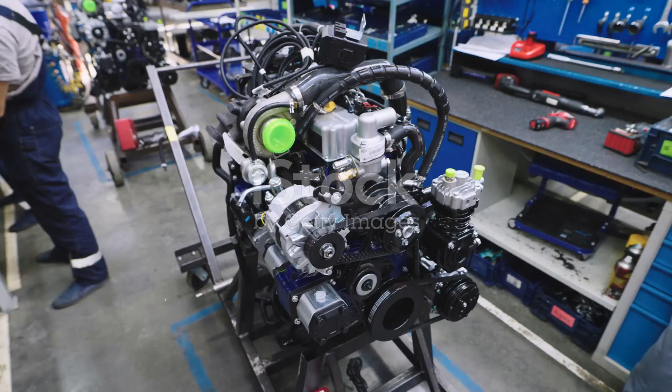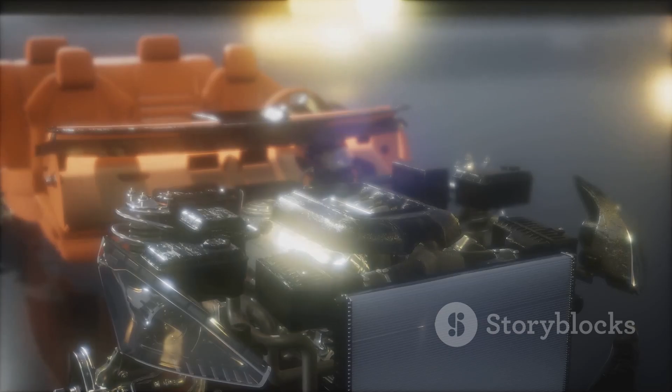Engines are the beating hearts of countless machines that power our world. From cars and motorcycles to lawnmowers and chainsaws, these incredible devices transform fuel into mechanical energy, enabling motion and work. Understanding the different types of engines and their operating principles is key to appreciating the ingenuity behind their design and function. This essay delves into the fascinating world of internal combustion engines, exploring their classification, operation, and performance characteristics.

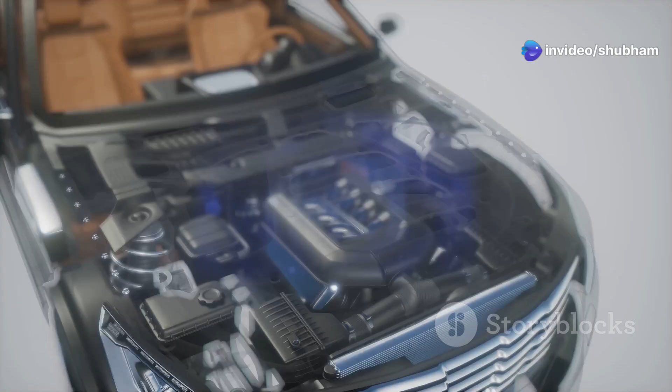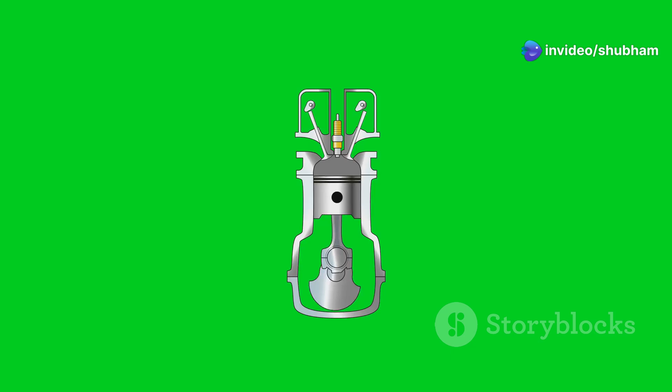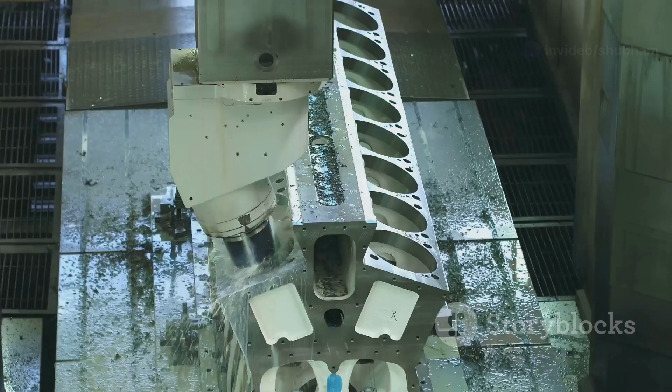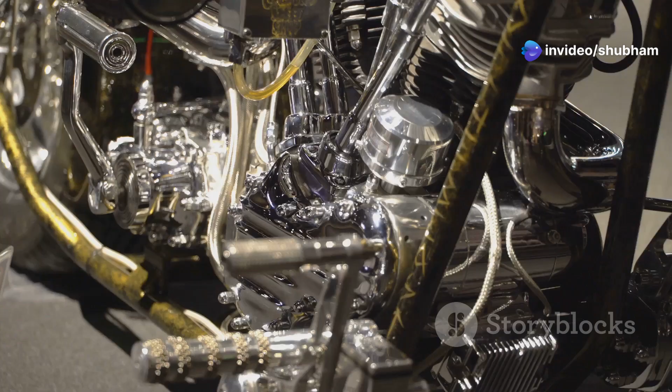Engines are broadly classified based on two key factors: the type of fuel they utilize and their operating cycle. Internal combustion engines, the focus of this essay, burn fuel within a closed chamber to generate power. These engines can be further categorized as either spark ignition (SI) or compression ignition (CI) engines, depending on how the fuel-air mixture is ignited. In SI engines, commonly found in gasoline-powered vehicles, a spark plug ignites a pre-mixed fuel-air charge. In contrast, CI engines, often used in diesel-powered vehicles and machinery, rely on the heat generated by compressing the air to ignite the fuel injected into the combustion chamber.

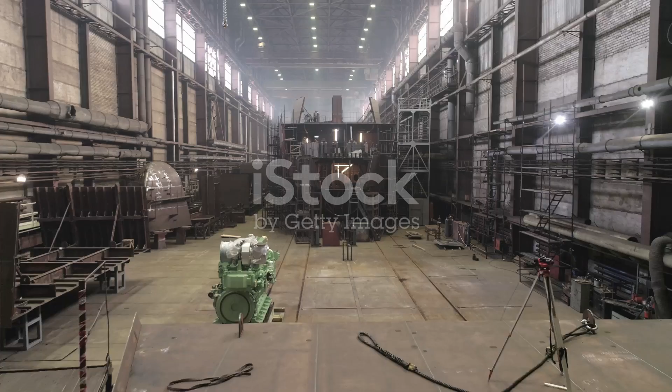This fundamental difference in ignition methods leads to variations in engine design, performance characteristics, and emissions. Understanding the distinctions between SI and CI engines, as well as their respective operating cycles, is crucial for comprehending the diverse applications and capabilities of these remarkable machines. By delving into the intricacies of engine design and function, we can gain a deeper appreciation for the engineering marvels that propel our modern world.

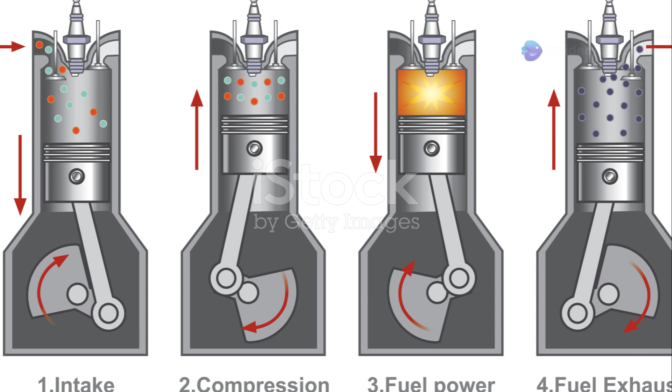Internal combustion engines, the workhorses of modern transportation and industry, derive their power from the controlled combustion of fuel within a confined space. Unlike external combustion engines, such as steam engines, where combustion occurs outside the engine, internal combustion engines directly harness the expansive force of burning fuel to drive mechanical motion.

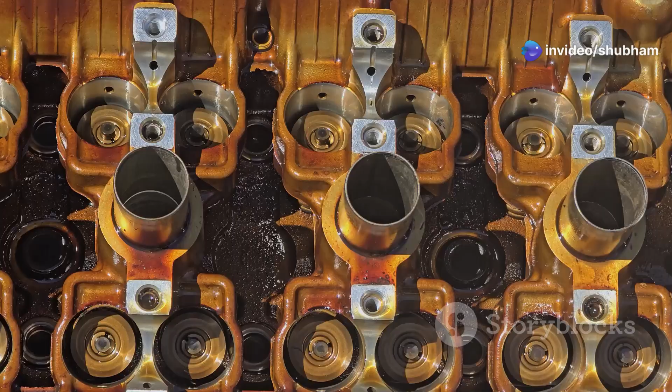At the heart of every internal combustion engine lies a cylinder, typically a cylindrical chamber, housing a piston that moves back and forth. This reciprocating motion of the piston is converted into rotary motion, which ultimately powers the wheels of a vehicle or drives other machinery.

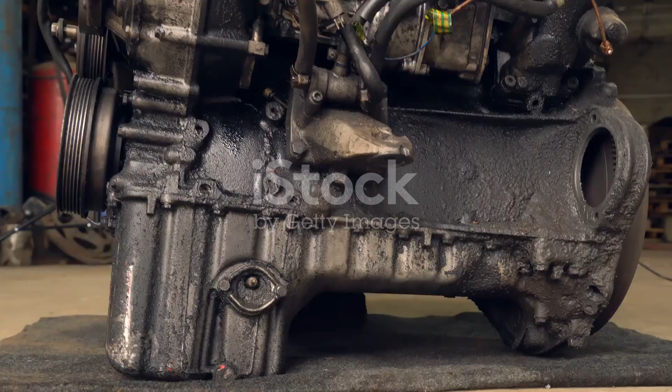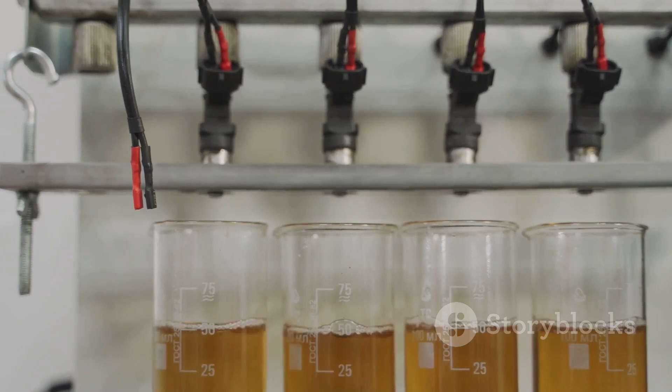The combustion process within the cylinder is a carefully orchestrated dance of fuel, air, and ignition, designed to extract maximum energy from the fuel while minimizing waste and emissions. The fuel, whether gasoline, diesel, or other combustible substances, is mixed with air in precise proportions to create a combustible mixture. This mixture is then introduced into the cylinder, where it is compressed by the piston.

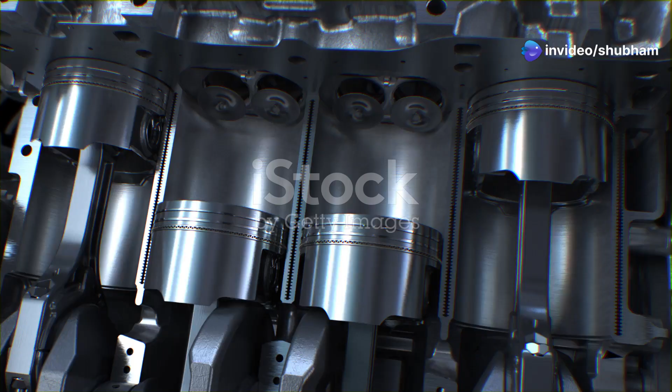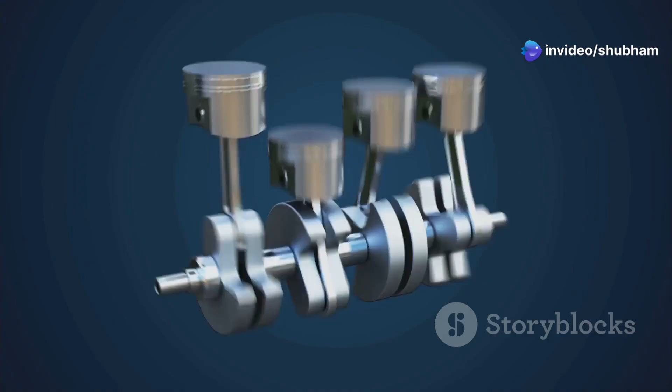The compressed mixture is ignited either by a spark from a spark plug in SI engines or by the heat of compression in CI engines, causing a rapid expansion of gases. This expansion of gases exerts a powerful force on the piston, pushing it downwards and initiating the engine's power stroke. The reciprocating motion of the piston is transmitted to a crankshaft via a connecting rod, converting the linear motion into the rotary motion that drives the vehicle or machinery.

Understanding the principles of internal combustion is essential for appreciating the ingenious design and operation of these ubiquitous powerhouses.

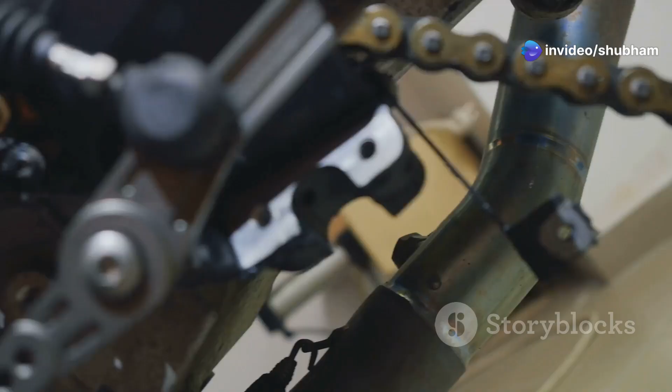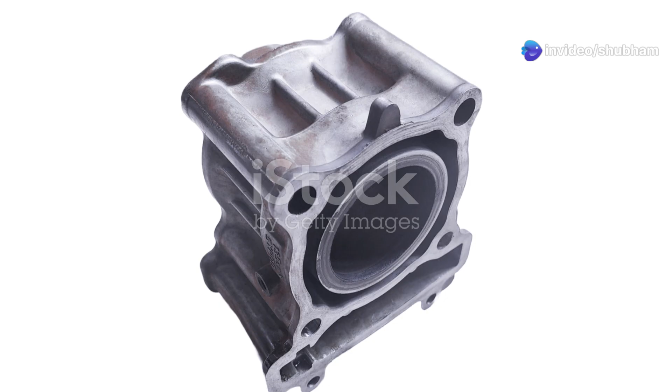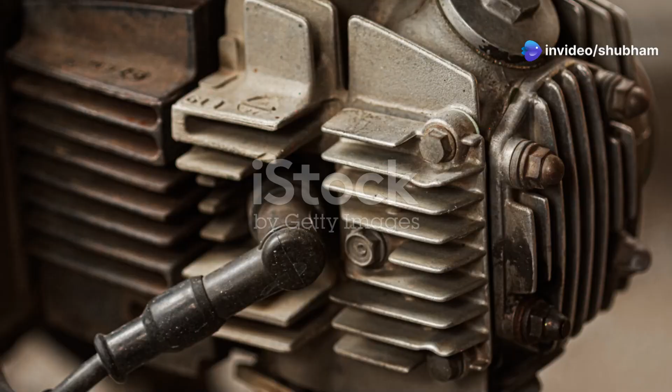Two-stroke engines, known for their simple design and high power-to-weight ratio, complete a power cycle with just 2 strokes of the piston, or 1 revolution of the crankshaft. Unlike their 4-stroke counterparts, two-stroke engines lack dedicated valves for intake and exhaust, relying instead on ports in the cylinder wall that are covered and uncovered by the piston's movement. This simplified design, while offering advantages in terms of compactness and weight savings, comes with certain trade-offs.

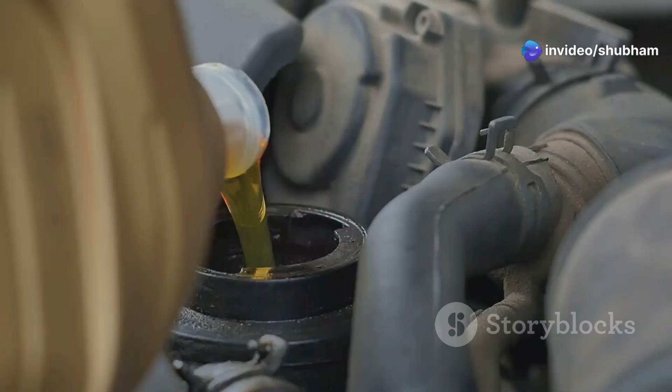The absence of dedicated valves necessitates the mixing of lubricating oil with the fuel, as the piston cannot effectively lubricate the cylinder walls on its own. This oil-fuel mixture is then drawn into the crankcase, which acts as a temporary reservoir before being transferred to the combustion chamber.

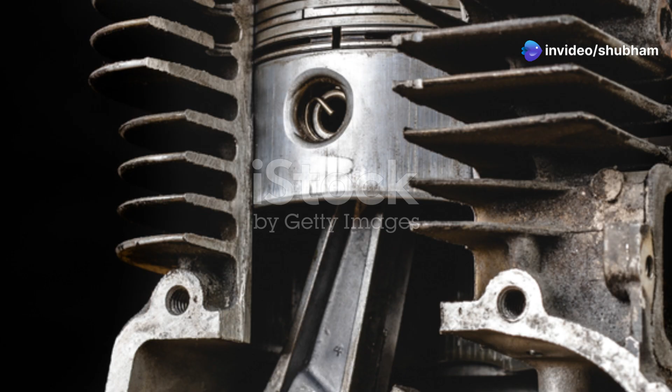As the piston moves upwards, it compresses the fuel-air mixture in the combustion chamber, while simultaneously drawing a fresh charge of fuel-air mixture into the crankcase through the intake port. When the piston reaches the top of its stroke, ignition occurs, either by a spark or compression, forcing the piston downwards.

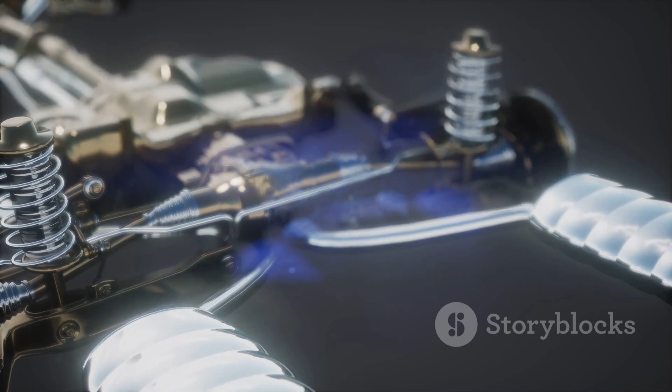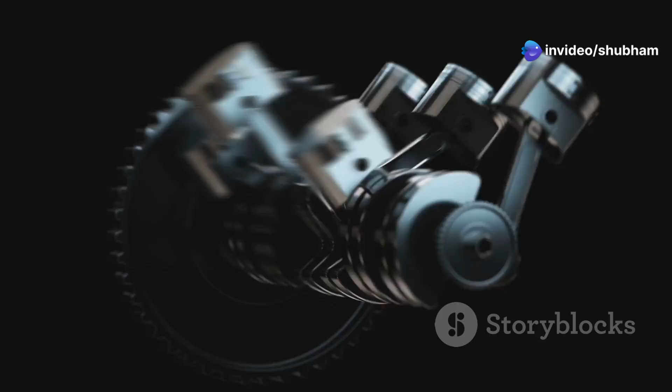During this downward stroke, the piston first uncovers the exhaust port, allowing the burnt gases to escape. Further downward movement uncovers the transfer port, allowing the fresh fuel-air mixture from the crankcase to flow into the combustion chamber. The upward stroke then repeats the cycle, compressing the fresh charge and expelling the remaining exhaust gases. This continuous cycle of intake, compression, combustion and exhaust occurring within 2 strokes of the piston makes the 2-stroke engine a compact and powerful, albeit less efficient and more polluting, alternative to its 4-stroke counterpart.

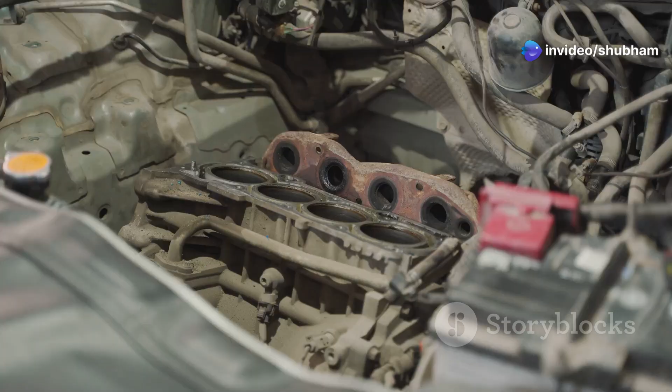4-stroke engines, the dominant type of internal combustion engine in automobiles and many other applications, operate on a more complex but ultimately more efficient cycle than their 2-stroke counterparts. As their name suggests, 4-stroke engines require 4 strokes of the piston, or 2 complete revolutions of the crankshaft, to complete one power cycle. This cycle consists of 4 distinct stages: intake, compression, power and exhaust.

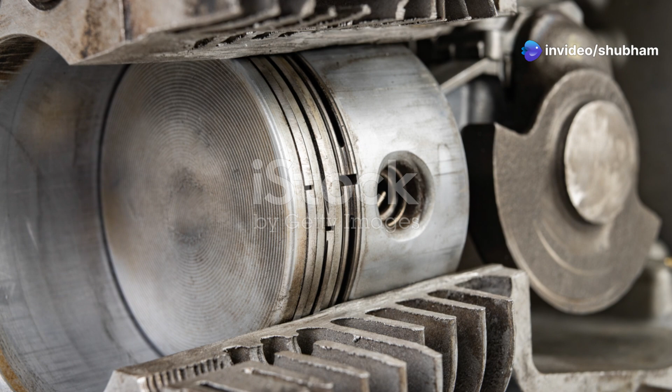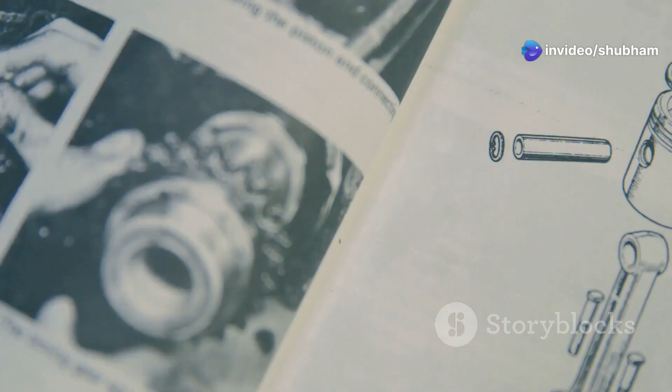During the intake stroke, the piston moves downwards, drawing in a fresh charge of fuel and air through an intake valve located in the cylinder head. As the piston reverses direction and moves upwards, the intake valve closes and the trapped fuel-air mixture is compressed.

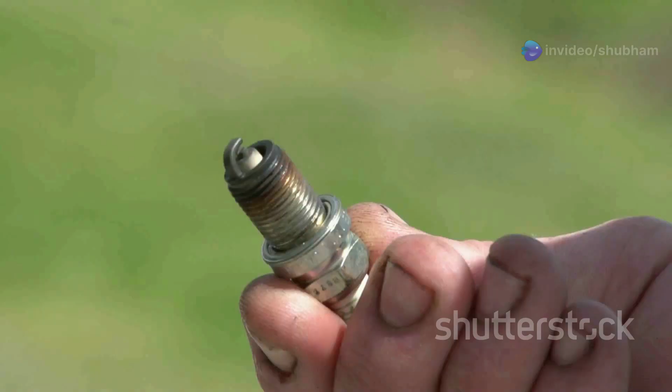This compression stroke significantly increases the temperature and pressure of the mixture, preparing it for ignition. At the top of the compression stroke, ignition occurs, either by a spark from a spark plug in gasoline engines, or by the heat of compression in diesel engines.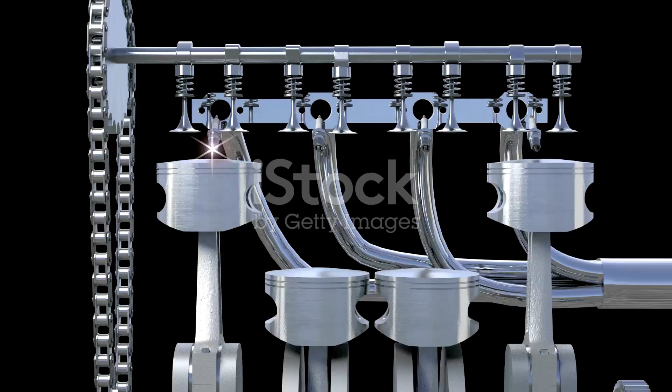The resulting combustion rapidly expands the gases, forcing the piston downwards in a powerful stroke that constitutes the engine's power phase. As the piston nears the bottom of its stroke, the exhaust valve opens, allowing the burnt gases to be expelled from the cylinder by the upward-moving piston during the exhaust stroke. This completes one full cycle of the 4-stroke engine, with the process repeating continuously to generate power.

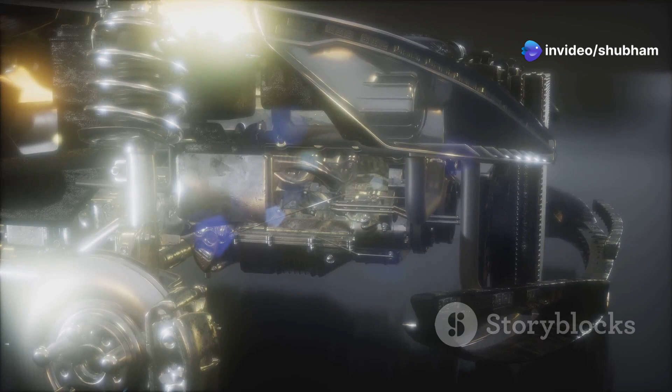The 4-stroke cycle's separation of intake, compression, power and exhaust strokes allows for a more controlled and efficient combustion process, making it the preferred choice for a wide range of applications.

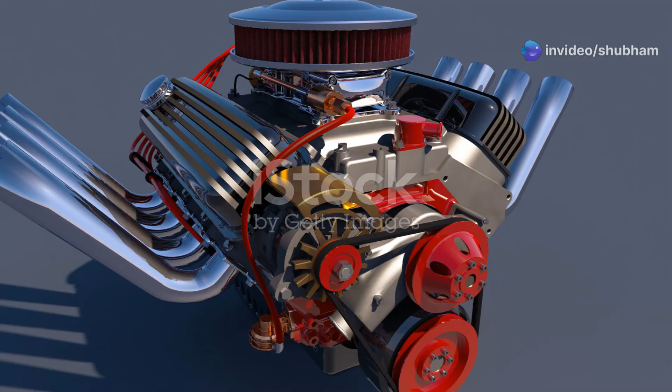Section 5. Mapping the engine's heartbeat: indicator diagrams. Indicator diagrams, graphical representations of the pressure changes within an engine's cylinder during one complete cycle, provide valuable insights into the engine's performance characteristics.

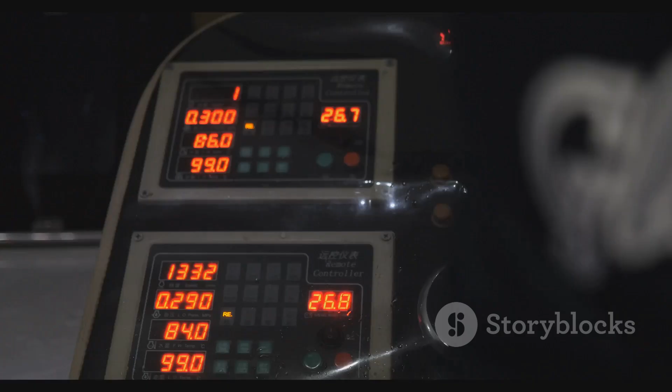These diagrams, traditionally obtained using mechanical indicators but now commonly generated electronically, plot cylinder pressure against piston displacement or crank angle. The shape of the indicator diagram reveals crucial information about the combustion process, valve timing, and overall engine health.

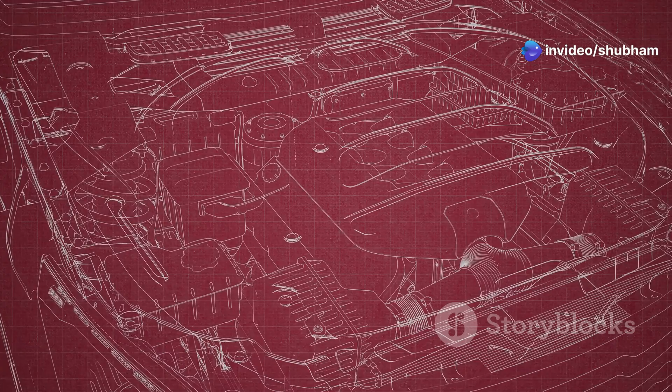The area enclosed by the diagram represents the work done by the gases on the piston during one cycle. Analyzing this area allows engineers to calculate the engine's indicated power, a measure of the power developed within the cylinder.

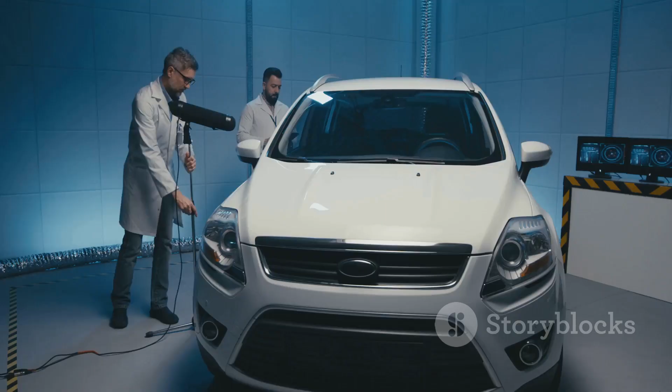Theoretical indicator diagrams, based on idealized thermodynamic cycles, serve as benchmarks for comparison with actual engine performance. Actual indicator diagrams, obtained from real-world engine testing, deviate from the ideal due to factors such as heat transfer, friction losses, and the complexities of the combustion process.

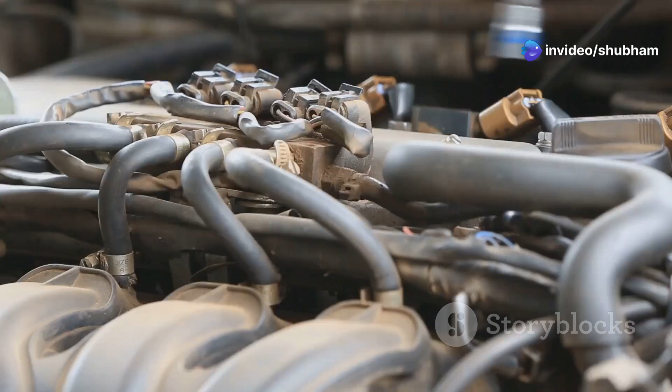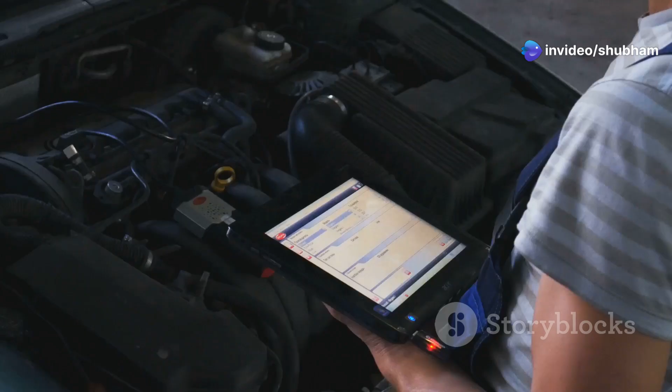Comparing theoretical and actual indicator diagrams helps engineers identify areas for improvement in engine design and operating parameters. By analyzing the shape and characteristics of these diagrams, engineers can optimize valve timing, combustion chamber design, and other factors to enhance engine efficiency, power output, and emissions performance. Indicator diagrams, therefore, serve as invaluable tools for understanding and improving the performance of internal combustion engines.

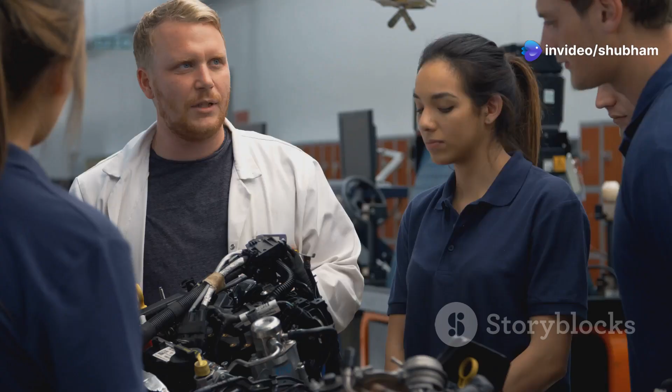Section 6. Power and efficiency: measuring engine performance. Evaluating engine performance involves assessing its power output and efficiency, both crucial factors in determining its suitability for various applications.

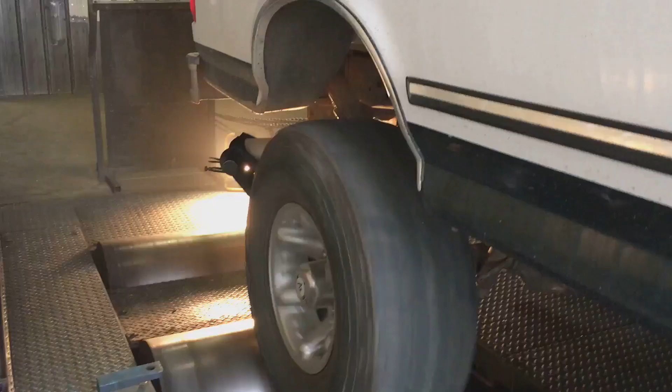Indicated power, calculated from the area enclosed by the indicator diagram, represents the theoretical power developed within the cylinder, while brake power measures the actual power delivered to the output shaft.

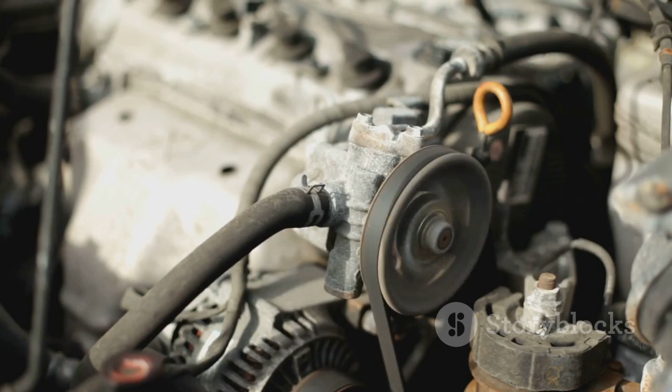The difference between indicated power and brake power reflects the frictional and mechanical losses within the engine, such as friction between moving parts and energy consumed by auxiliary components like the oil pump and alternator. Mechanical efficiency, defined as the ratio of brake power to indicated power, quantifies these losses.

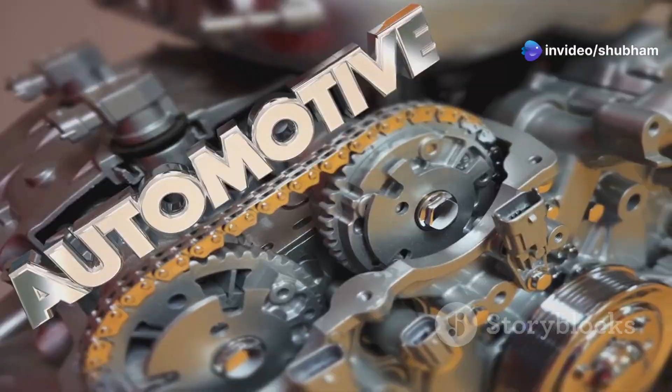Thermal efficiency, another crucial performance metric, measures how effectively the engine converts the chemical energy stored in the fuel into useful work. It is defined as the ratio of the work output to the heat input from the fuel.

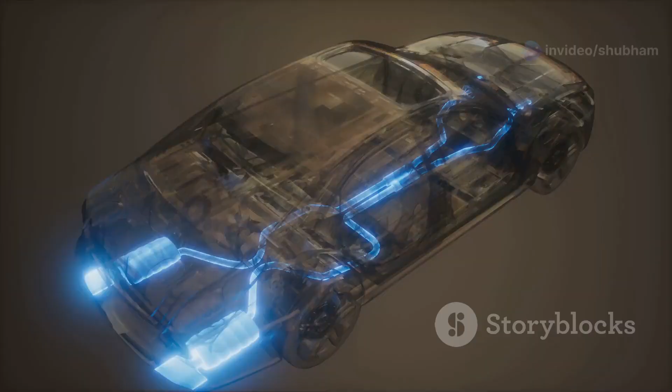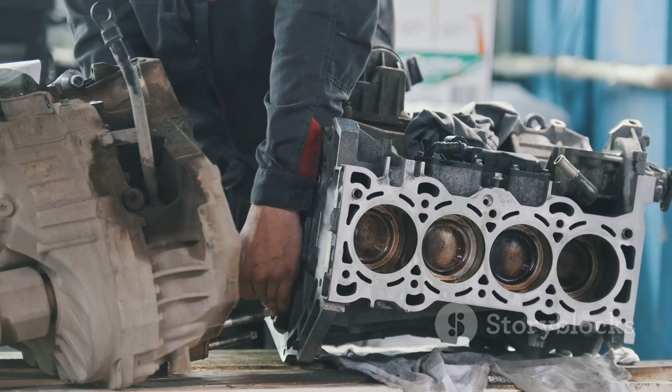Higher thermal efficiency indicates that a greater proportion of the fuel's energy is being utilized, leading to better fuel economy and reduced emissions. Factors influencing thermal efficiency include compression ratio, combustion chamber design, and operating conditions.

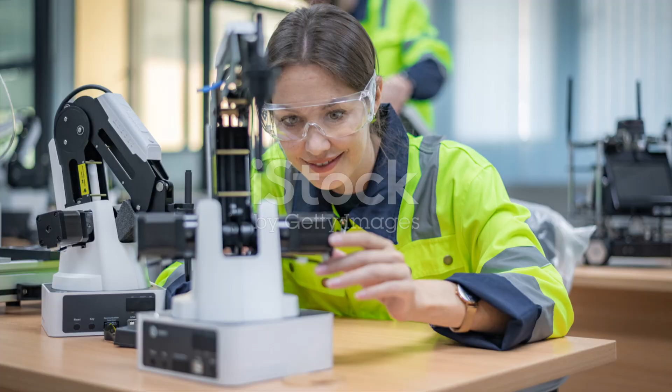Engineers strive to maximize both mechanical and thermal efficiency to improve engine performance, reduce fuel consumption, and minimize environmental impact. Understanding and optimizing these efficiency parameters are paramount in developing cleaner, more sustainable, and high-performing engines.

Section 7: Timing is everything. Valve and port timing diagrams.

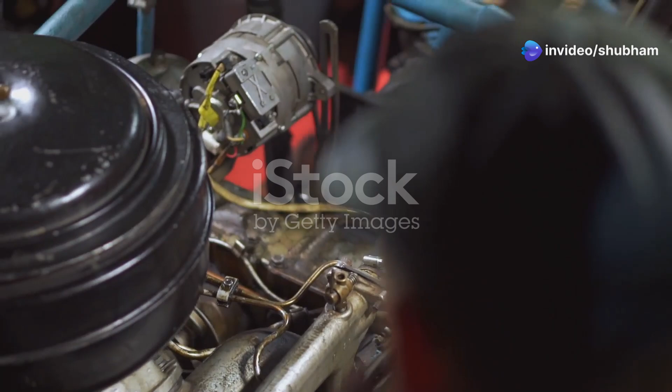Valve and port timing diagrams are graphical representations of the precise timing of valve and port openings and closings relative to the position of the crankshaft. These diagrams are crucial for understanding and optimizing the flow of gases into and out of the cylinder, which directly impacts engine performance. In four-stroke engines, valve timing diagrams illustrate the opening and closing points of the intake and exhaust valves in degrees of crankshaft rotation.

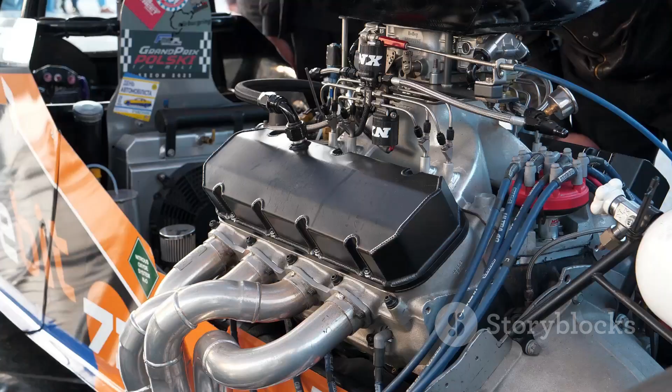The timing of these events is carefully orchestrated to maximize the amount of fresh charge entering the cylinder during the intake stroke and to effectively expel the burnt gases during the exhaust stroke.

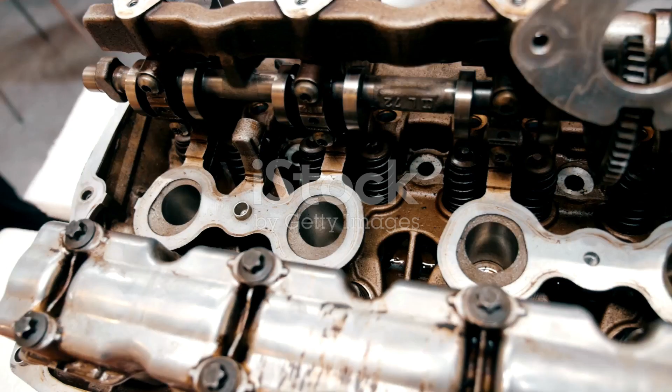Two-stroke engines, lacking dedicated valves, rely on ports in the cylinder wall that are covered and uncovered by the piston's movement. Port timing diagrams for two-stroke engines depict the opening and closing of the intake, transfer, and exhaust ports relative to the piston's position. The timing of these events is critical for controlling the flow of fuel-air mixture into the cylinder and for scavenging exhaust gases.

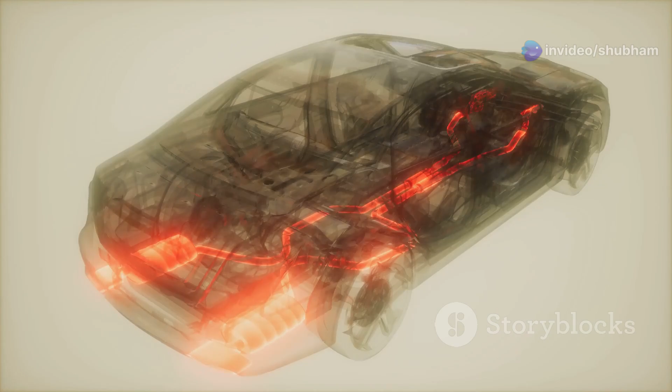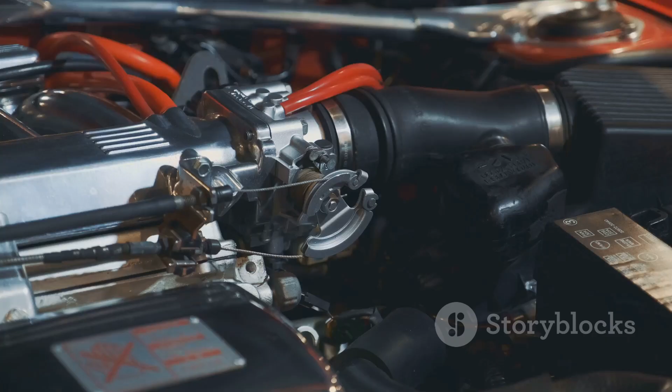Optimizing valve and port timing is essential for achieving desired engine characteristics. Early or late valve or port openings and closings can significantly affect engine performance, influencing factors such as volumetric efficiency, torque output, and emissions. Precise timing ensures efficient gas exchange, maximizing power output and minimizing fuel consumption.

Section 8: Igniting the charge — combustion in SI and CI engines.

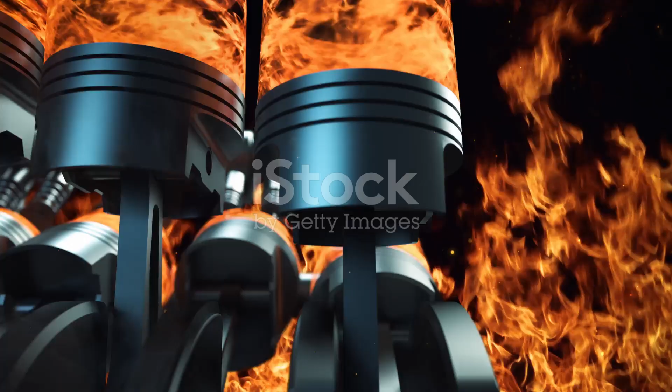Combustion, the heart of the power generation process in internal combustion engines, involves the rapid chemical reaction between the fuel-air mixture and oxygen, releasing heat and producing exhaust gases. Spark ignition (SI) and compression ignition (CI) engines, however, employ distinct methods to initiate and control this combustion process.

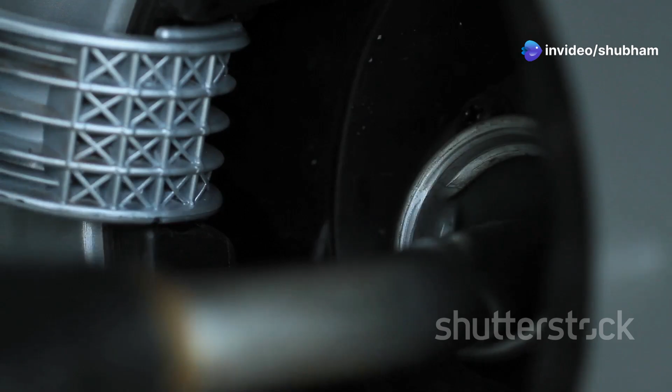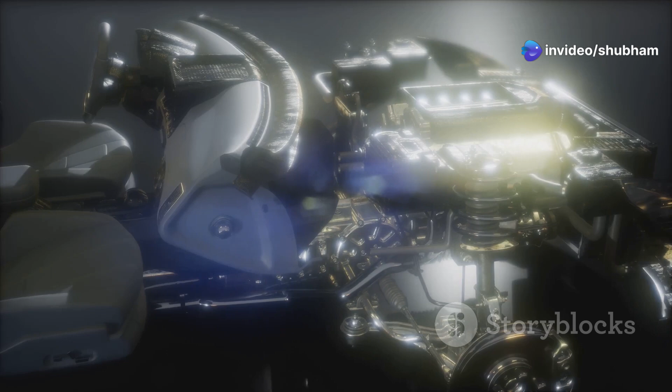In SI engines, commonly found in gasoline-powered vehicles, a spark plug ignites a pre-mixed fuel-air charge drawn into the cylinder during the intake stroke. The spark, timed to occur near the end of the compression stroke, creates a flame front that propagates through the compressed mixture, causing a rapid increase in pressure and temperature. This expansion of gases forces the piston downwards, generating power.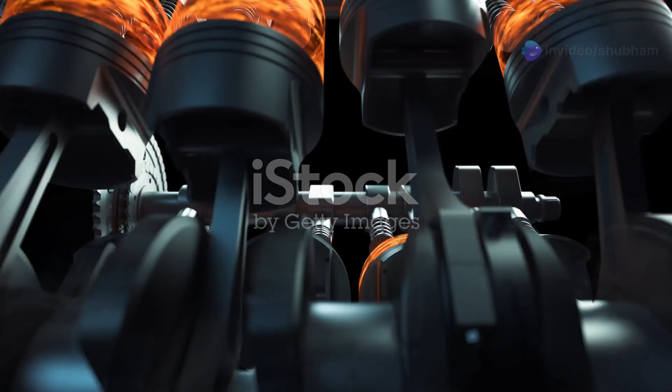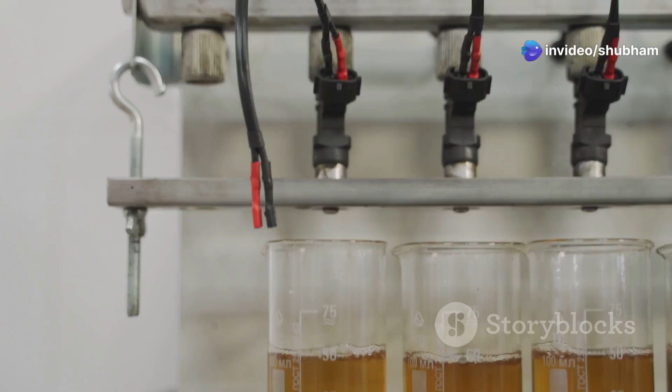CI engines, widely used in diesel-powered vehicles and machinery, operate on a different principle. Instead of a spark plug, CI engines rely on the heat generated by compressing the air to a much higher degree than in SI engines. Fuel is injected into this hot compressed air towards the end of the compression stroke, and it ignites spontaneously due to the high temperature. Combustion in CI engines is therefore controlled by the timing and rate of fuel injection, as well as the design of the combustion chamber.

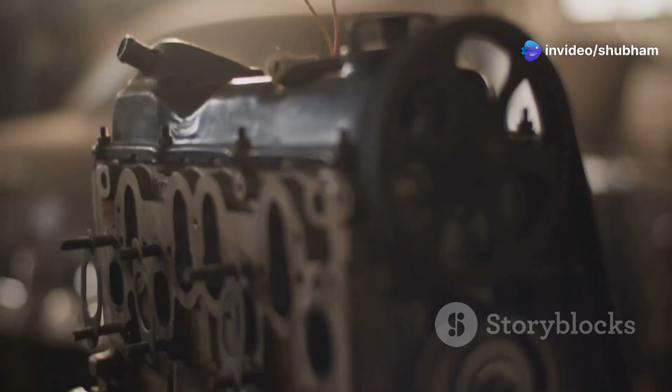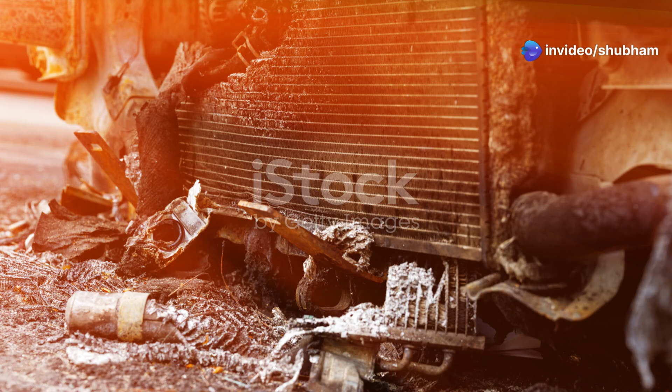Understanding the distinctions between SI and CI combustion processes is fundamental to comprehending the design and operational differences between these two major categories of internal combustion engines. Factors such as ignition timing, fuel injection characteristics, and combustion chamber design significantly influence engine performance, emissions, and efficiency.

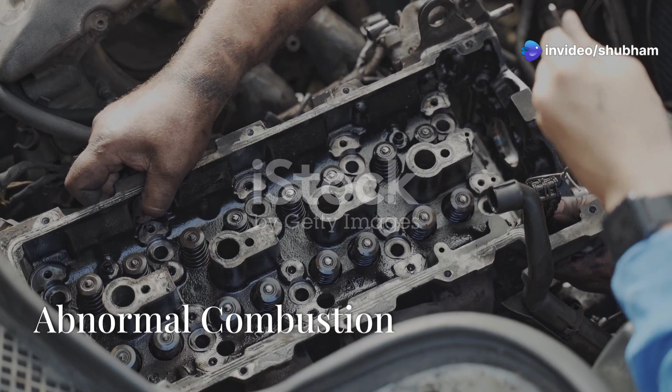Section 9: Knocking on trouble's door — abnormal combustion.

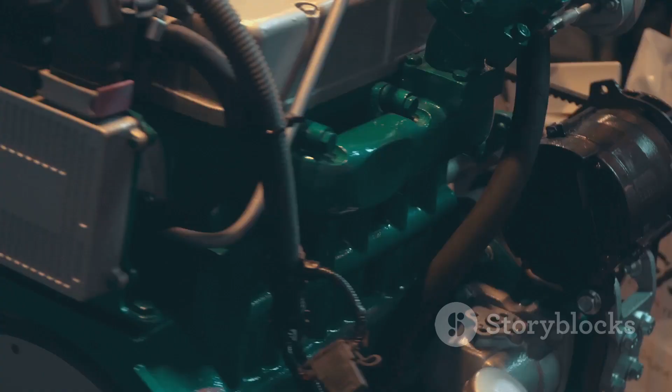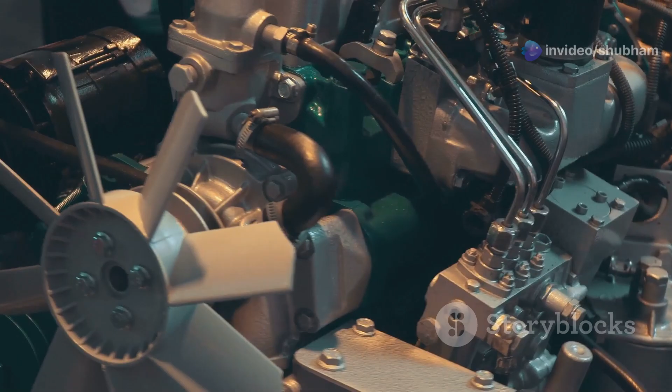While the combustion process in internal combustion engines is carefully controlled for optimal performance, deviations from ideal conditions can lead to abnormal combustion phenomena, such as knocking or detonation, which can negatively impact engine performance and longevity. In SI engines, knocking occurs when the fuel-air mixture auto-ignites before the spark plug fires, creating multiple flame fronts that collide, producing a characteristic knocking or pinging sound. This uncontrolled combustion can lead to excessive cylinder pressures and temperatures, potentially damaging engine components.

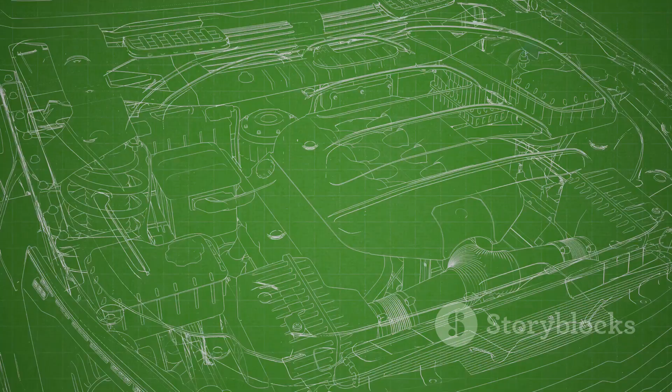In CI engines, a similar phenomenon known as diesel knock can occur if the fuel ignites too quickly upon injection, resulting in a rapid pressure rise and a harsh knocking sound. Diesel knock can be caused by factors such as incorrect fuel injection timing, low cetane number fuel, or inadequate combustion chamber design. Abnormal combustion in both SI and CI engines can lead to reduced power output, increased fuel consumption, and elevated emissions.

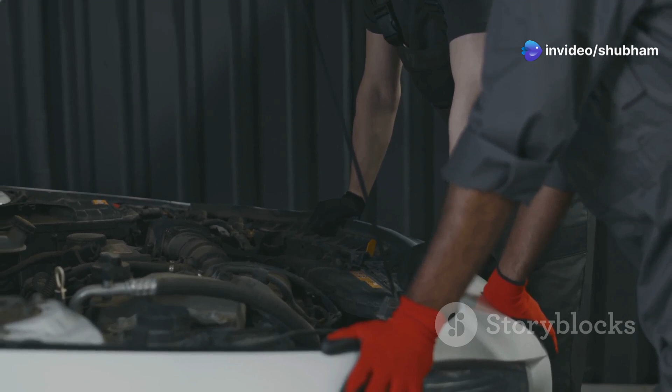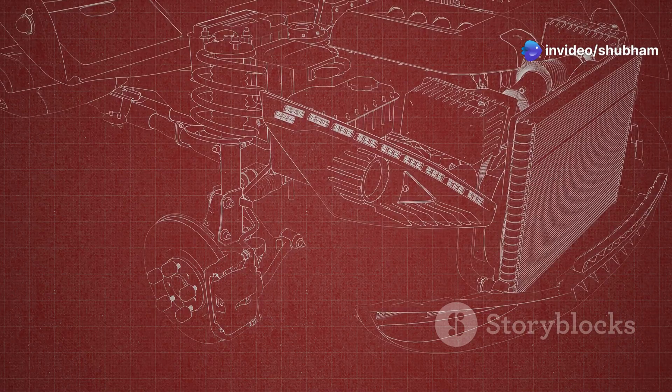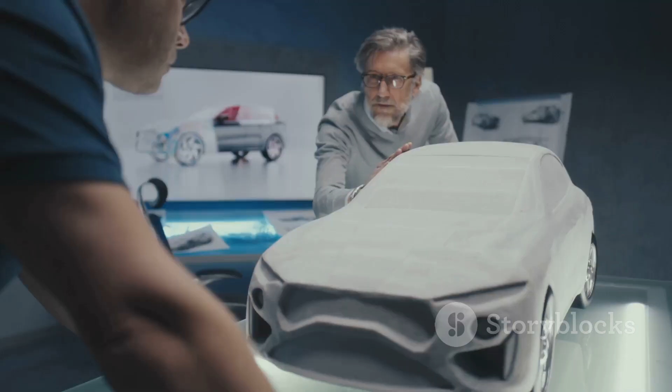Factors contributing to abnormal combustion include low-quality fuel, high compression ratios, improper ignition timing, and excessive engine load. Preventing and mitigating abnormal combustion involves optimizing engine design and operating parameters, as well as using fuels with appropriate properties. Understanding the causes and consequences of abnormal combustion is crucial for ensuring the smooth, efficient, and reliable operation of internal combustion engines. By addressing factors contributing to these phenomena, engineers strive to maximize engine performance while minimizing potential damage and environmental impact.